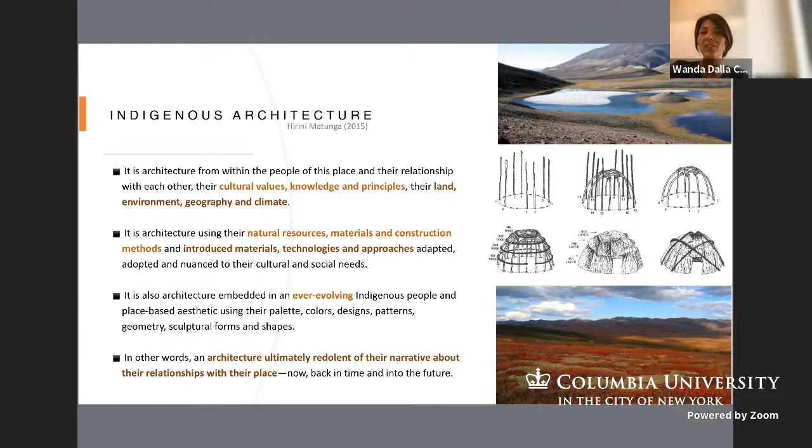He's also talking about introduced elements—again, we are still here and we are adapting. This work isn't about replicating the past, it's about introducing new things. In the third bullet point, he's talking about this notion of ever evolving—again, bringing to light that we are still here, continuing to interrogate and evolve our architectures. Finally, in the last bullet point, he's talking about a narrative that is about a relationship with place.

In the second definition, he talks about an actual formula—a 7-part formula that he proposes. If you work through all 7, you arrive at what I've been calling a deep architecture. Is it possible to do Indigenous architecture light, where you only hit 2 or 3 of these? Of course. So with this definition, when I get asked who can create Indigenous architecture—anyone who can follow this beautiful definition laid out for us.

I'll highlight a few of the words so we can remember them as we go through this presentation today. It's clear about a genealogy, where it came from. It connects to an archetype—again, my tipi situated on screen—a response to an Indigenous need, which could be past, present, or future, and a structural articulation of cultural and social values.

Next is the place-based narrative he brings out again. Then he follows it up with knowledge, worldview, and cosmology. Cosmology is interesting—I'll show you a project that we're starting to connect to moon systems. It's fantastic. And then lastly, of course, it has to have an Indigenous meaning.

So let's jump into the first section, Pluriverse Rising: Field Transformation. I'll just touch on the word pluriverse. It was brought to my attention in the last year or so, and it's such a beautiful word that recognizes the plurality of our world that I have been using it constantly to describe the work that we're doing.

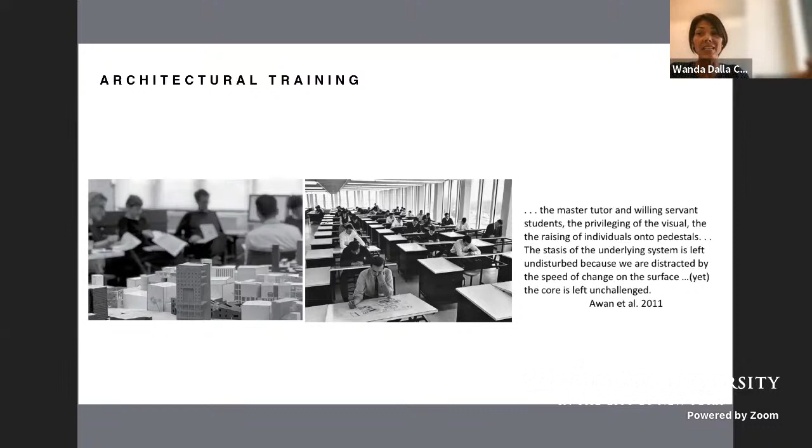I want to talk to you about what I see in the field here that tells me there's a field in flux. I was recently reading the book Spatial Agency, which many of you are probably familiar with, and they talked about architectural training being stagnant. We still have the tutor, the servant, the privileging of the visual, raising of individuals onto pedestals, and yet the stasis of the underlying system is left unchanged because we are distracted by the speed of change on the surface.

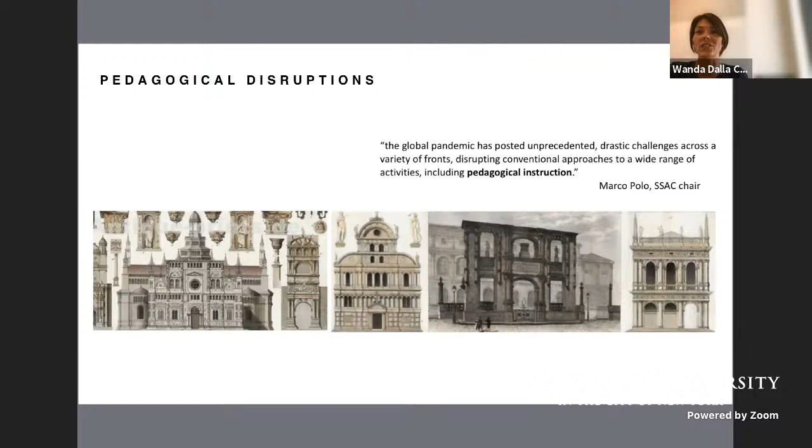I think a second indication that we are in a state of flux: I was presenting at the Society for the Study of Architecture in Canada, and the chair there talked about the disruption happening in pedagogy and how we teach. He said the global pandemic is bringing about unprecedented and drastic changes, including the way we teach, and I would agree.

In our school at Arizona State University, our school has a motto: it's about who we include, not who we exclude. We have a lot of first generation students, similar to myself, whose parents have never been to university, and we have a lot of diverse students here, whether through geography or through policies.

Recently a group of students formed something called the Design Justice Initiative, where they went to the leadership with a series of demands, saying that if those demands were not met, they were going to the press. I heard afterward that a lot of other schools across North America were undergoing a very similar disruption. The students were rebelling against the faculty, the composition, and the curriculum they were being taught, and they were hoping for more broad teachings.

So when I went to do my research to understand why they were upset, I realized that yes, 72% of architecture faculty in North America schools come from Caucasian backgrounds. I am part of the 0.2% of Indigenous faculty in architecture schools. I think this is changing quickly in the last decade or so, but I think it is part of the issue that the students identified, that the faculty don't look like them.

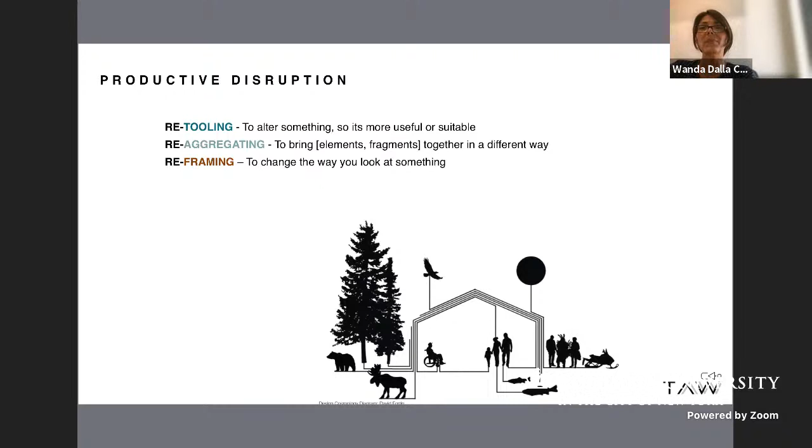Again, I'm Cree, and so when I go into a Blackfoot or a Dene or a Navajo community, I am also an outsider, and I have a lot of learning to do. So we study archetypes of the region, we study their views on ecology, we study meaning and material, so that when we go in, we might have some familiarity with what's important to them.

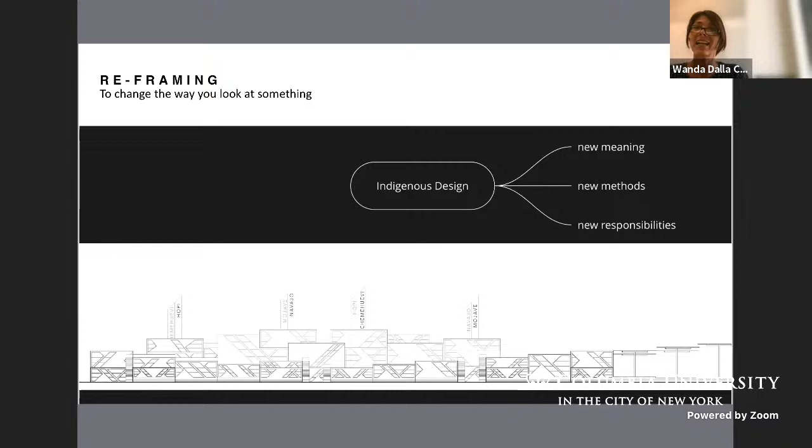In the last section here, the reframing section, how we change the way we look at something, I've started to think about this as a bundle of Indigenous design. And I think, what does it offer the world? If I could describe to people what it brings to the world, I think it actually brings new meaning. It brings new methods, new ways of working. And I think, and I hope, it brings new responsibilities. Let me share each of those with you.

In terms of new meaning, I think some of the most powerful learnings that we have done with our communities, and again, it's been about 25 to 30 years of working with various communities across Turtle Island or North America, I think, of course, number 1 is that notion of being place-based. You know, in architecture school, people used to say, oh, I was inspired by this landscape, I was inspired by elements in the landscape. But I think being inspired by a place and having a generational history where your great-great-great-grandparents inhabited that place and left you with stories of that place, are 2 very different things. And so I think, can Indigenous design help reconnect us to place in a really genuine and meaningful way, bringing back all of those knowledges that these generations of people have created?

The second thing on this list is the values. I'm finding that whenever we do work, value systems are very important. We've started working, I'm sure many of you are aware of Harvard working with a series of value-based systems for their urban just design work. And so we're looking at that as a tool to begin to capitalize on values as a driver for architecture.

The third thing, in terms of new meaning, are the alternate capitals. You know, I've often shared that architecture has been focused a lot on economics and aesthetics, and I think the other aspects of it need equal attention: the social, the symbolic, the environmental, and the cultural.

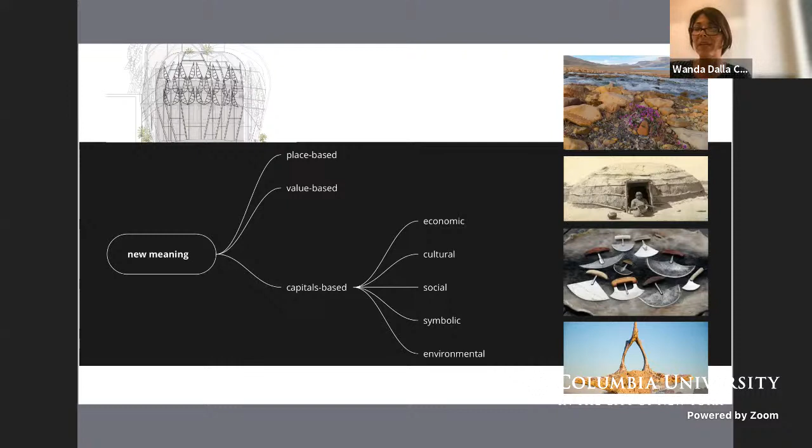In terms of new methods, this is, I think, a really special offering that Indigenous design brings to the table. I've noticed with Indigenous design, because we come from a consensus-based community and a consensus-based governance system, that we are very interested in a consensus-based process. We're also interested in non-hierarchical strategies for engaging. We have a relationship with the natural world, but we also have a relationship with all of the people in the community. No one is higher than others. And I think it creates this power shifting that I think is really powerful.

The second thing is the lived experience. Again, being from a place gives you a really different vantage point, and I think that's really important to integrate. So instead of getting a consultant to help you with a local project, why don't you just get an artist from the community, bring in that lived experience directly to the project?

Mutual learning. I think before we thought that we would go out, take what we need, and then do our thing as architects. And I think now we're realizing there's more of a back and forth that happens.

Number four, reciprocity. How do we actually provide value through the notion of architecture? I share with my students that we should be able to name the value that we are giving back by doing a project. And if we can't name it, we should go back to the drawing board, right? It can't be about, I'm going to create a great piece of architecture, or I'm going to win an award with this thing, or I'm going to try something really innovative and cool. It's about how we are helping social, cultural, environmental, and so forth.

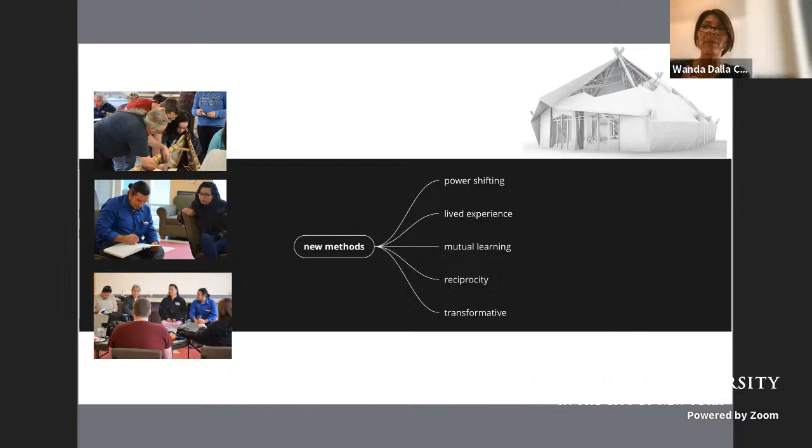And then finally, the work should be transformative. It should be able to give back long after we finish in the community.

Finally, in terms of new responsibilities, I get really excited about this section because I think the Indigenous worldview, as you know, it's about connecting to a very far future. We have something called a 7-generation worldview, where we believe we are protecting the environment for 7 generations in the future. Some Indigenous cultures believe we are in the 3rd generation now, and that we look back 3 generations and we look forward. But regardless, the fact that we are looking toward the future to think, I think adds a responsibility to this profession that I think could be very powerful in the way the profession is in flux.

The second thing is the custodial relationship to the environment, how we're caring for Mother Nature. Again, if it's part of our land family - nature, the rocks, the trees, the sky, the air, and the elements - and we start to have a steward relationship, I think that would be a benefit.

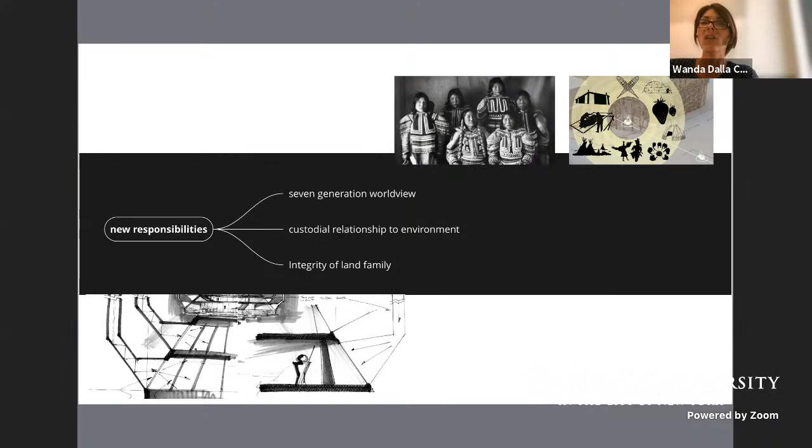And then finally, connecting to the integrity of the land family, all of the land family, from the 2-legged to the 4-legged to the winged ones, to all of the people on our planet.

For the last section of this presentation, I want to share with you what I call the middle ground. I will go through a number of projects within our firm, and I'm going to couch them in the theory of cultural sustainability.

This was such a transformative piece of work that I read, that I want to share with you some of the words from the authors. It was a paper by Paul Memmott and Kathy Keys called Redefining Architecture to Accommodate Cultural Difference, Designing for Cultural Sustainability. In that paper, they talk about a theory of cultural sustainability being about architecture that is sensitive to and encompassing of cross-cultural contexts and values, and not overly dominated by Western concepts of what architecture is, including what high architecture is according to Euro and North American traditions.

They say that the alternate definition of architecture encompasses not just buildings, but the objects within, on and around buildings, as well as the associated meanings, values, and behaviors.

They also say that without a more balanced definition of architecture, architects will continue to be vulnerable in designing in an ethnocentric manner, possibly providing a good fit in their architecture for their own cultural group, but inadvertently creating a bad fit for other cultural groups who may require to use this architecture. They say that bad fits may result in users becoming stressed to varying degrees, or being unable to cope, or even avoiding engaging in that built environment.

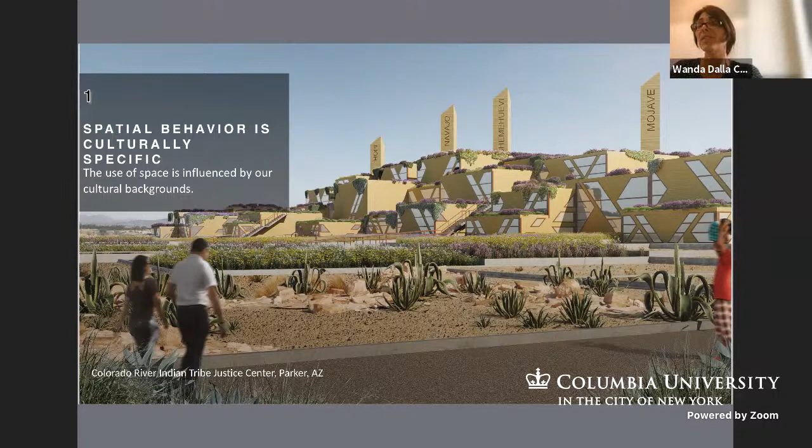I chose a project which is a justice center. As many of you know, our value systems as Indigenous people relate to restorative justice systems, where we are trying to heal and ensure that the person going into the justice system has an opportunity to get better. So instead of putting someone into an institution where there is no help, we're open to restorative justice. And I think this is an important value system that changes the architecture, changes the cultural meaning.

When we walk into that space, of course, there are symbols that denote that space. There are also emphases on natural elements. Here, there are plants and water.

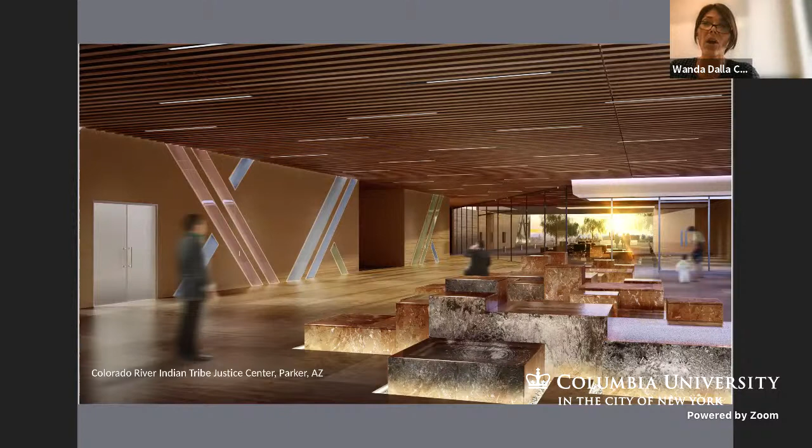The second tenet of cultural sustainability theory, number 2: human needs and environmental attributes are complex, and if aligned well, lead to increasing complementary functionality.

What you see on screen is the Indigenous people space in Ottawa, Ontario. It's hard to tell, but underneath all of that structure is a colonial building that 3 Indigenous architects were given to design an Indigenous people space. And I often joke that after we cried tears on our drawing boards at the irony of being given a colonial building, a leftover building, to create an Indigenous people space, we got to work. And we wanted to see if we could draw out a complementary functionality.

We found out that the building was thermally inefficient, so we had to cover it. And so we were quite happy. We could preserve this moment in our Canadian history, but we could also create an identity for the building that was much different from what was underneath.

What you see on the outside of that building is a shape of a blanket wrapping. The blanket to us is a gift, and we wanted to denote that caringness for our communities. Those small pieces that you see on the outside, some people say they're snowshoes or feathers. Other people see various natural forms in them.

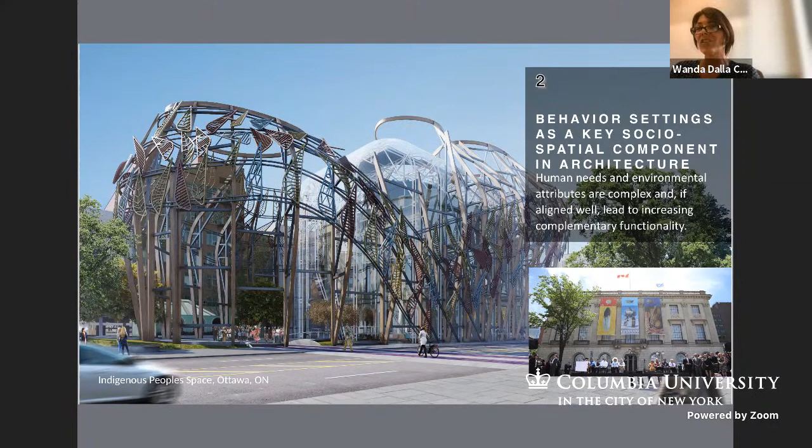In terms of the complementary functionality within the building, we have a series of gathering spaces. Again, this is about incorporating our lifeways in the city. On the lower level, which you see on the right-hand side, is a place for performance and dance in ceremony.

And on the upper left-hand side, you see another gathering space that looks directly out onto the Canadian Parliament. On the lower left, the interstitial space encloses the colonial history of Canada.

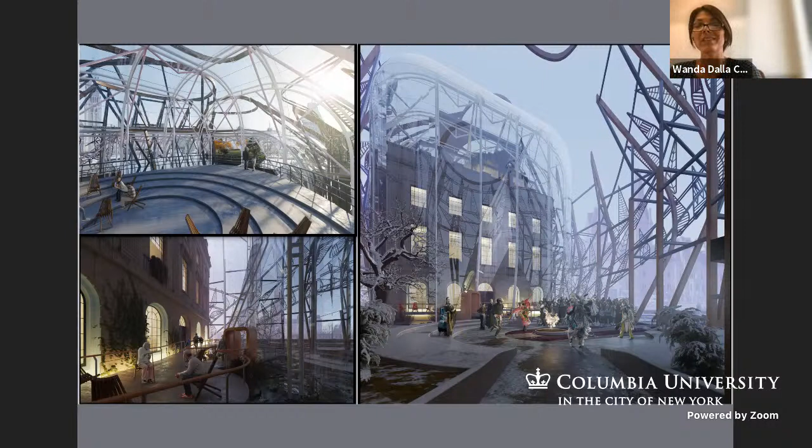In the third tenet of cultural sustainability theory, it reads—and this was a life-changing tenet for me in this theory—there are ideological, social, and behavioral meanings that need to be understood, including high-level meanings such as worldview, mid-level meanings such as identity, and low-level meanings such as use.

So if you think of Indigenous design, I think these three distinctions are critically important. Worldview: how do you capture the worldview, the belief system of the people? Secondly, how do you represent their identity? And third, how do you provide spaces for functions and use?

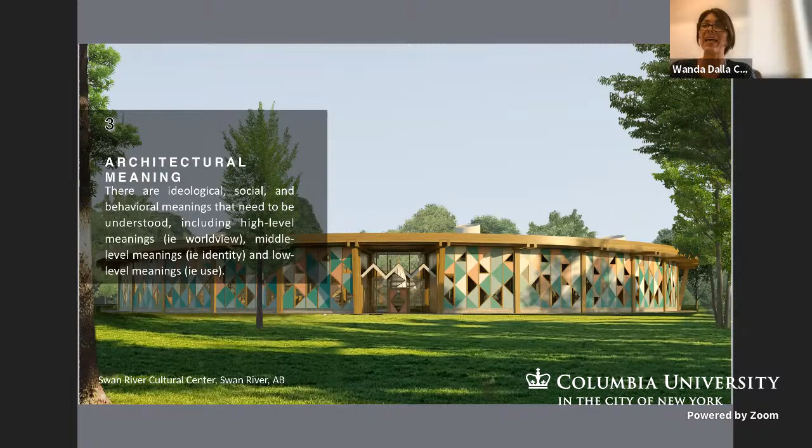So inscribed on the benches that go around that inner circle are the Cree words for each of those moon systems. Again, we're reintroducing worldviews and belief systems back into the architecture and putting them as transparent and as obvious in the architecture in order to rebuild those connections.

Number 4: exogenous, or outside, design and decision-making either undermines or reinforces cultural systems. You see on screen St. Francis Cree Bilingual Elementary School in Saskatoon, Saskatchewan.

The precedent of the area is a teepee, so again this looks nothing like a teepee. But what we did do is take the old syllabics, phonetic characters you see on the outside of that building that missionaries used to create this communication system to communicate with the Indigenous people of the region. We wanted to take the syllabics back and create positive messaging on the school in a form that connected more to our worldview, which is about our connection with nature, the sky, and the organicness of the earth.

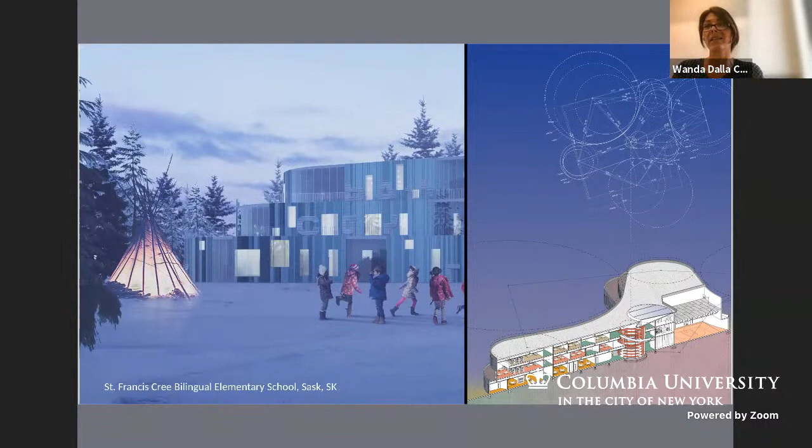Number 5: there are culturally specific understandings of what it means to be well. What you see on screen is Western University, the Indigenous Learning Centre in London, Ontario.

There was not a garden that cascaded down to that lower building. What they gave us, again, was a leftover space, an outdoor space they wanted to gather in, and a renovation of that drum building in the back. We were excited because the drum building had a circle, and we identify with circles - it's a shape from nature. So the community looked at how we house all of the functions for the Indigenous students.

What is critical here are the belief systems of the students on campus and the long history of institutionalism, where some buildings, such as universities, have been very unwelcoming to Indigenous people. It's very intimidating. I remember my first time going to a university campus, it was really, really intimidating. This was a very foreign place.

We were thinking about how we integrate Indigenous concepts of wellness with a welcoming place. So we spoke with the elders, did a great big series of engagements, and came up with a cascading garden that would lead down into spaces that now had more light and a view of a natural garden when you look outside. What you see, the structure on the outside, is a place for storytelling and gathering.

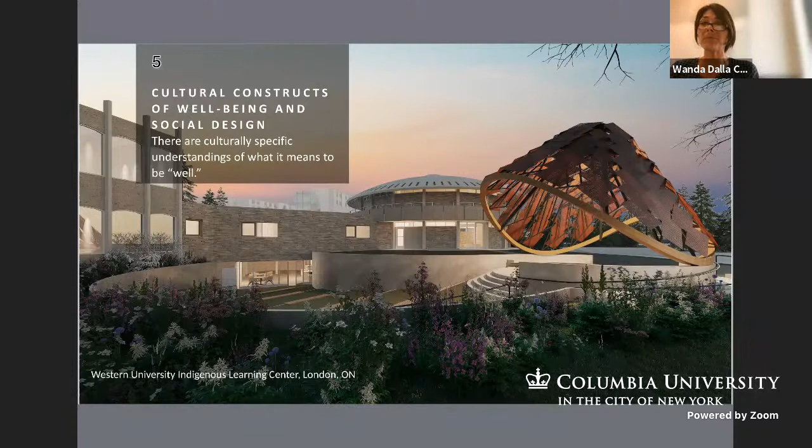These are the interior renderings, it's in construction right now. Some features to point out to make it welcoming: on the upper right-hand side, we found all the Indigenous language greetings for the number of nations in the area, and we have welcome greetings on a series of installation panels that welcome the greeters to that space. On the lower right-hand side, you see a storytelling space or gathering space, which looks more like home instead of an institutionalized building. Again, it was about creating a welcoming space.

On the left-hand side, you see a floor plan of the main drum in the large rotunda building, and the lines inscribed on our floor are solstice and equinox. So we ended up cutting windows in that room to be able to connect to those beautiful origin lines of our cosmology.

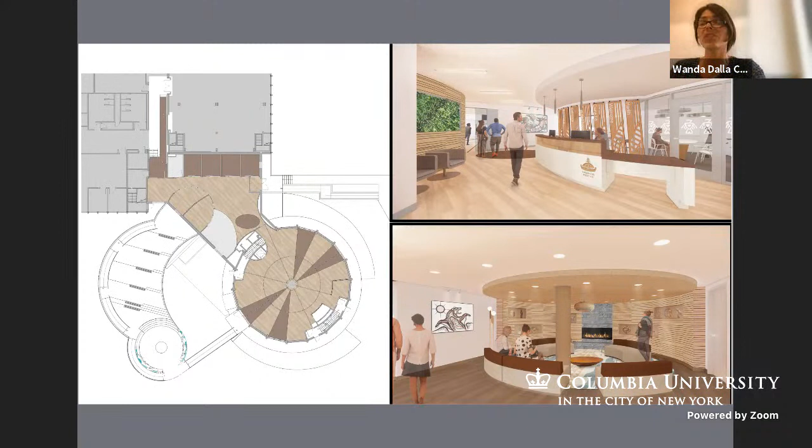Number 6: architects are members of cultural groups, enculturated within a social value system.

This is a project we did, an interior project for Arizona State University here in Tempe. Taking language as a departure point, we connected with three Indigenous artists who specialize in graffiti font, and we asked them to help create a series of language greetings in all of the Indigenous languages in Arizona and put them on the wall to greet the students. They did a phenomenal job, and the university was so excited with the results, which you see on the lower right-hand side, done with wood inlaid in resin, that they asked us to create another piece.

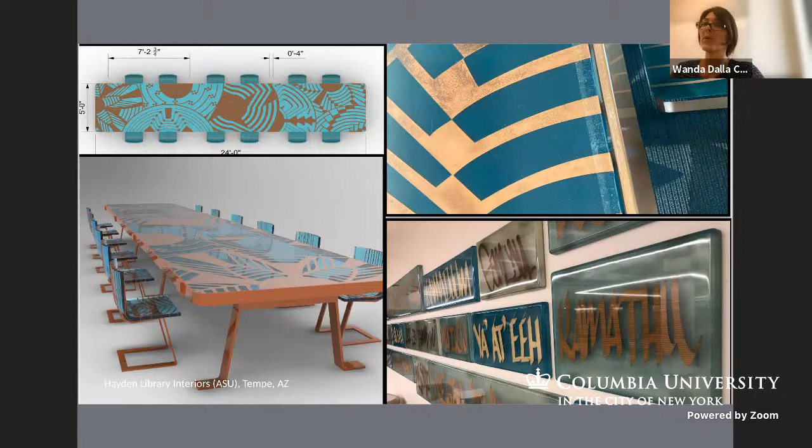So what you see on the top right is a test piece of a table that we're creating, again done in line with a local Indigenous artist. What he was connecting to was a series of baskets that tell a story and share the lifeways of the people of this region. That was just installed in the university. We work a lot with artists in this work, and we find that's a really beautiful way to dive deep into the stories of this place.

And I think this is really our goal. If we can get to this point where every piece of architecture inspires us and connects us and shares with the world an understanding of who we are and our belief system, I think anyone can help us create Indigenous architecture. With that, I would like to say thank you for listening, and I look forward to answering questions and having a conversation.